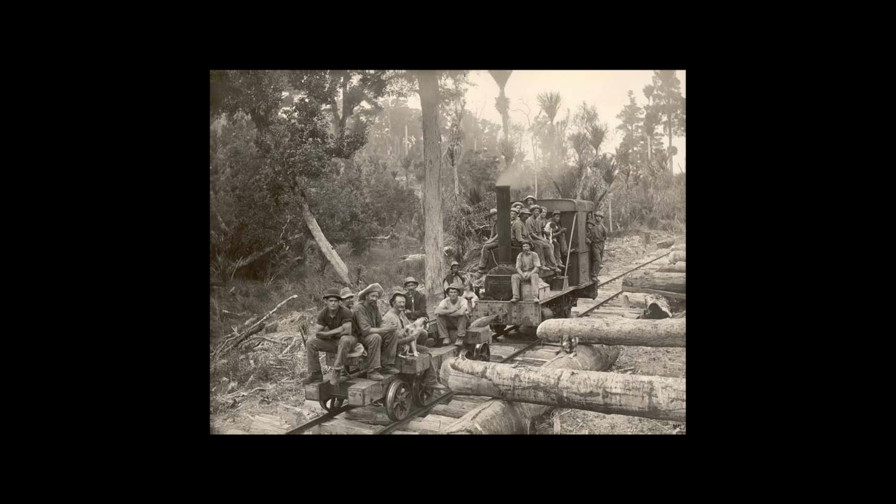When it comes to designing and building locomotives, logging railroads remain unmatched in the variety and uniqueness of their engines. This was mostly due to the unique circumstances each railroad faced, such as the geography of the land, how heavy the loads were, and how much money the line had to work with. Each railway usually came up with their own solutions, but for the bush tramways of New Zealand, the one solution they all seemed to have in common was just to add more wheels.

Like many other countries in the late 19th century with a massive logging industry, New Zealand timber companies wanted a cheap and easy way to move logs. Most companies in America and Australia built tramways and temporary railways. However, the companies in New Zealand often didn't have the money to afford laying metal rails, especially if the tracks would only be temporary. As a result, many bush tramways used wooden rails in place of iron or steel ones, as not only were they significantly cheaper to build and dispose of, but could also be moved and relayed relatively easily.

The biggest drawback with using wooden rails, however, was that they weren't as durable, nor could they carry the same weight as their metal counterparts. As a result, many of New Zealand's bush tramways still had to use horses or towing cables to pull wood trains along their lines, as the wooden rails couldn't support the weight of most conventional locomotives. Despite this, there was still a demand for locomotives that could work on these rails, and so several engineering companies stepped up to fill this niche. One of them being Johnston Sons.

One of the locomotives they built, known as the Type A, was an 0-4-0 design weighing just 7 tons, featuring inside cylinders that drove an internal jackshaft to power its wheels. These engines were also fitted with broader wheels to allow them to run on both wooden and metal rails. 8 were built between 1896 and 1927, 4 being given tenders while the rest were simply operated as tank locomotives. Moore & Sons, who owned one of these engines, converted theirs to an 0-6-0 to help improve the engine's adhesion.

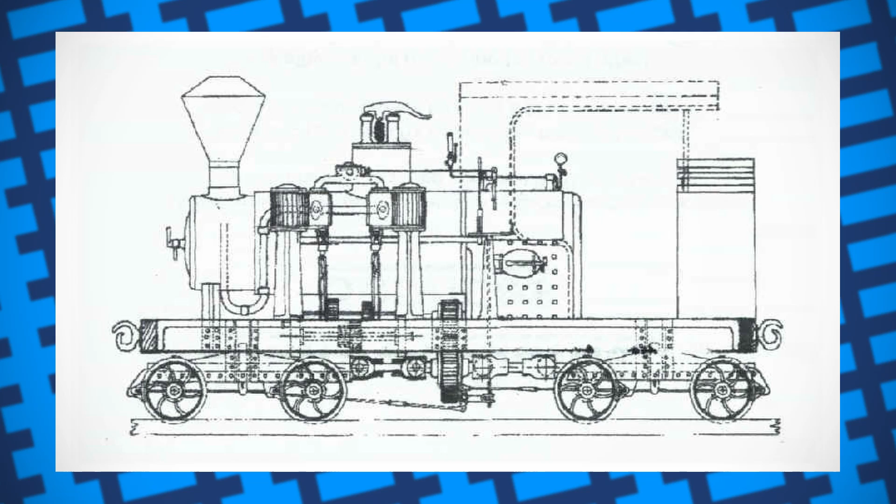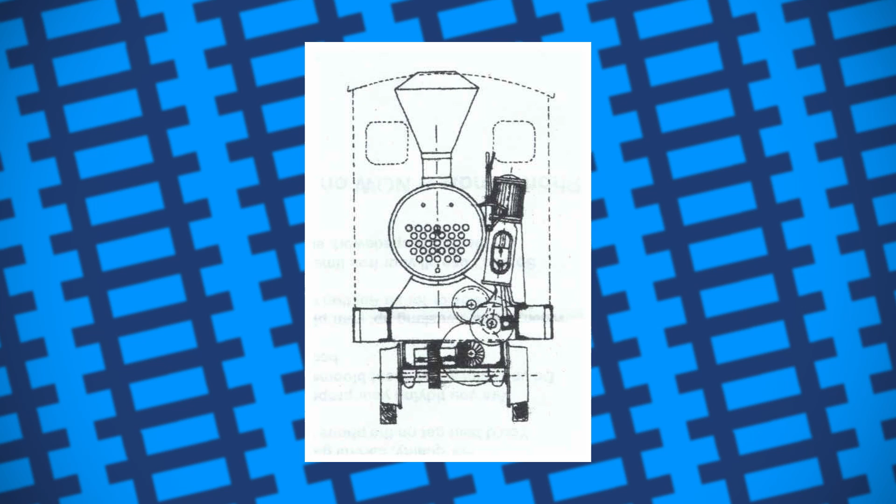Another type of engine Johnston built were the Type Bs in 1911, though these were built for use on steel rails, not wood. They were essentially pseudo-Shay locomotives, having an 0-4-4-0 wheel arrangement and 2 cylinders mounted vertically on one side of the boiler driving a jackshaft connected to the engine's wheels. The boiler was even off-centered to counterbalance the weight of the cylinders, just like Shay engines. The main difference between the Type Bs and the Shays was that the jackshaft was located between the frames rather than on the outside. Only 2 of these were ever built.

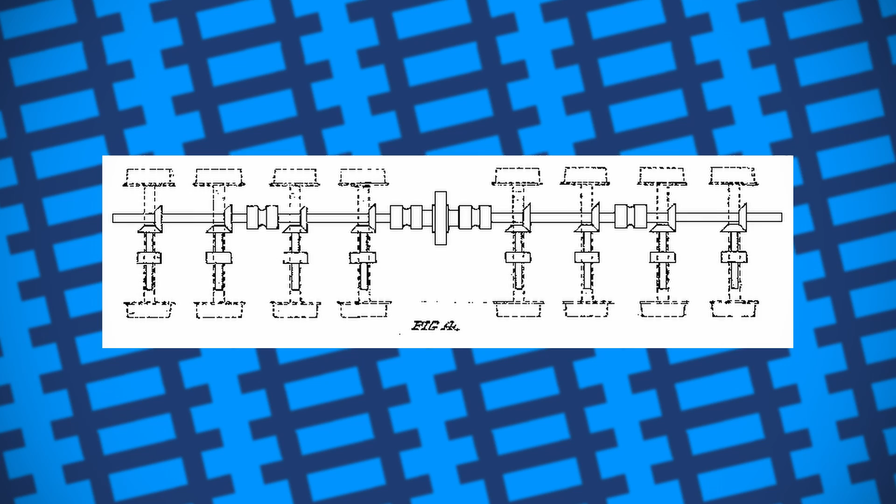But the most bizarre and fascinating locomotives ever built by Johnston were their Type Ds. Certain wooden railways could only handle loads of 2 tons per axle, making it difficult to design a locomotive both light enough to run on the line and powerful enough to do the work needed of them. The Type Ds were designed to meet that demand in 1910. These engines were fitted with 16 driving wheels to help evenly disperse their 16¼ ton weight over the rails.

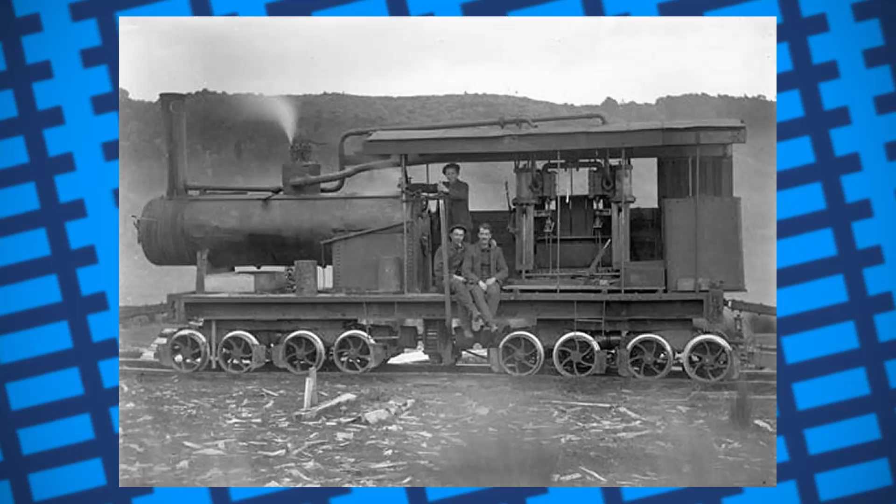The jackshaft that drove the wheels was set between the frames and used bevel gears to transfer rotation from the shaft to the wheels. The shaft itself was powered by 2 vertical cylinders pointed downwards, mounted behind the boiler to help with weight distribution, and was also fitted to allow the engine to be geared up and down if needed. The end result looked more like a caterpillar than a conventional locomotive.

Even with the additional gearing, these engines only ever managed a top speed of about 8 km an hour, and were known to quickly wear out the beveled gears that drove their wheels. Despite this, the design proved successful, with at least 16 being built between 1910 and 1927 by Johnston for use in sawmills and on wood-railed logging tramways.

Johnston, however, wasn't the only company to build these caterpillar-esque engines, as in 1912, A&G Price Limited produced what was known as the Price 16-wheeler. It was essentially an identical copy of the Johnston design, with the main changes being it used different gears in its wheels and could negotiate tighter turns, but was much heavier than its counterpart. 4 of Price's 16-wheelers were built, with one working from 1912 all the way to 1951.

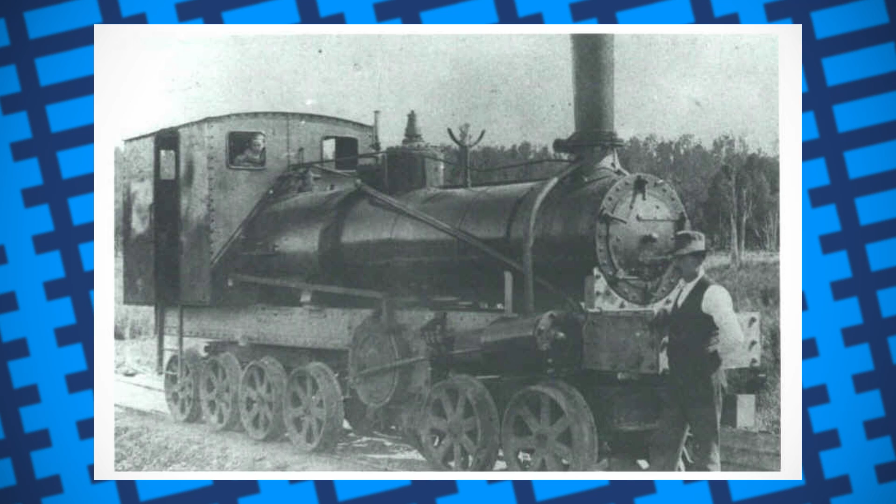Another similar design also came from G&D Davidson & Co. in 1916, this being known as the Heavy 12-wheeler. Unlike the previous designs, all the wheels of the engine were chain-driven as opposed to using gears and shafts, and it was also relatively lightweight, allowing it to run on wooden rails, unlike the Price engines. It was also less of a copy of Johnston's design and more of an upgrade/refinement of previous engines built by Davidson's. Only 2 of these engines were ever built.

For many bush tramways in New Zealand, it seemed that more wheels was simply the way to go for their engines. Obviously, these engines weren't without their flaws, only able to travel at very low speeds, requiring their gears be frequently replaced, and overall being more awkward in design compared to other contemporary geared locomotives like Shays and Climaxes. Despite this, these bizarre caterpillars, 16-wheelers, whatever you want to call them, were exactly the engines New Zealand's tramways needed. Just goes to remind us that no design is absurd if it works.